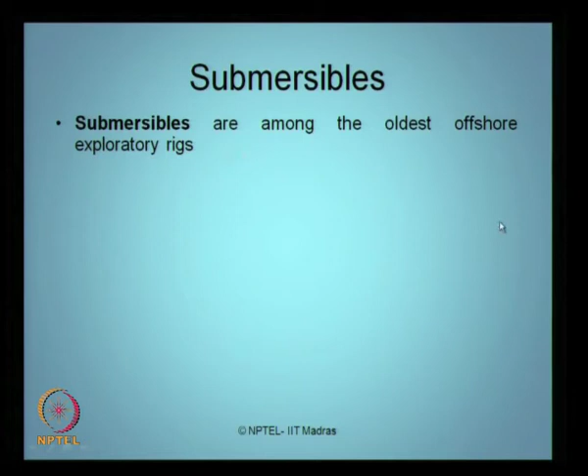What are semi-submersibles? Semi-submersibles are also compliant type drilling structures, one amongst the oldest offshore exploratory rigs used for oil exploration in deep sea. They typically operate in wetlands and swamps, standing in water depths up to 30 meters.

Submersibles include posted barges, bottle types, arctic types and inland barges. A submersible rig floats on the water surface when moved from one drilling site to another, similar to what we have seen in the last lecture about jack-up rigs.

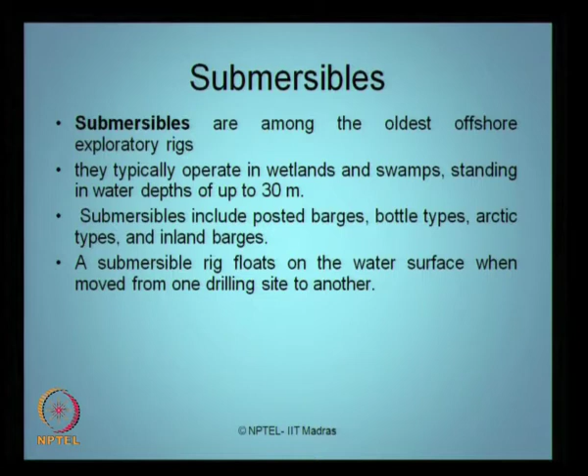When it reaches the destination, certain compartments are flooded, which we call ballasted, to submerge the lower part of the rig to the sea floor. The lower part of the rig rests on the sea floor and therefore the drilling operation can continue.

With the base of the rig in contact with the ocean bottom, it has a very good resistance for the encountered lateral forces like wind forces, wave forces and currents. They have very little effect on the structural motion of semi-submersibles.

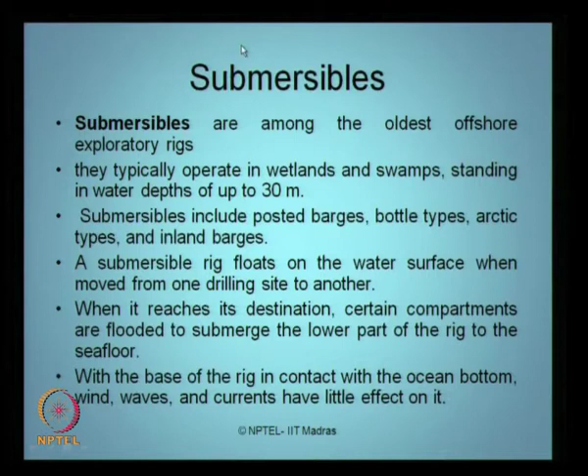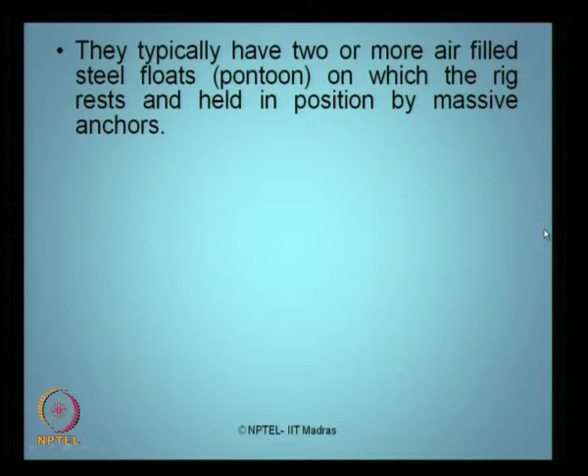They typically have 2 or more air-filled steel floats, which we call pontoons. They are similar to the pontoon member in tension leg platforms. There can be either 1 or 2 large size air-filled floats on which the rig rests, held in position by massive anchors to which these semi-submersibles are anchored to the sea floor.

Because the pontoons are usually submerged a few feet below the water surface, they have very high stability of operation during drilling, which is why they are called semi-submersibles. They have much better stability compared to a drilling ship, because a drilling ship actually floats in water while drilling is carried out, whereas semi-submersibles rest on the sea floor when drilling is carried out.

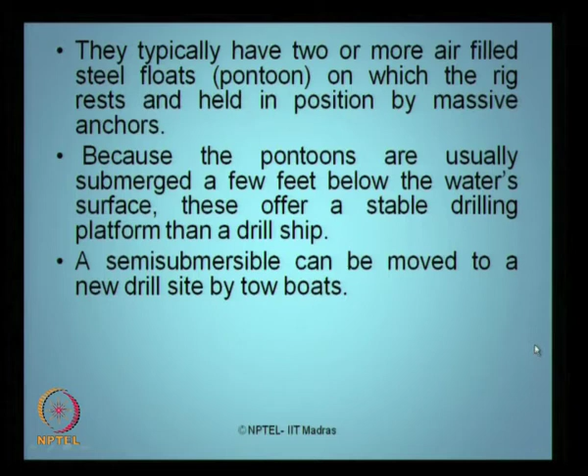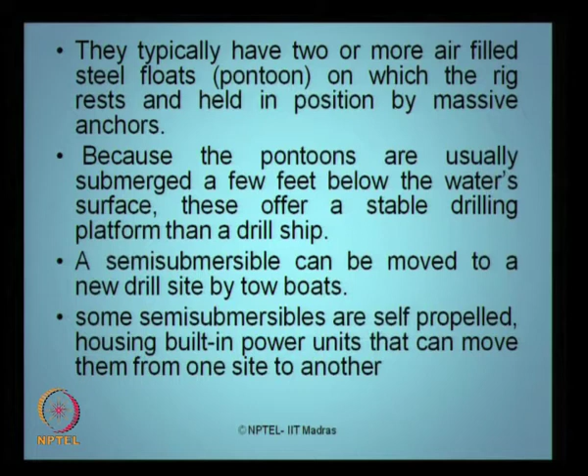A semi-submersible can be easily towed or moved from one site to a new one by towboats. Some semi-submersibles are also equipped with self-propelled inbuilt power units, which can be used to propel them from one site to another.

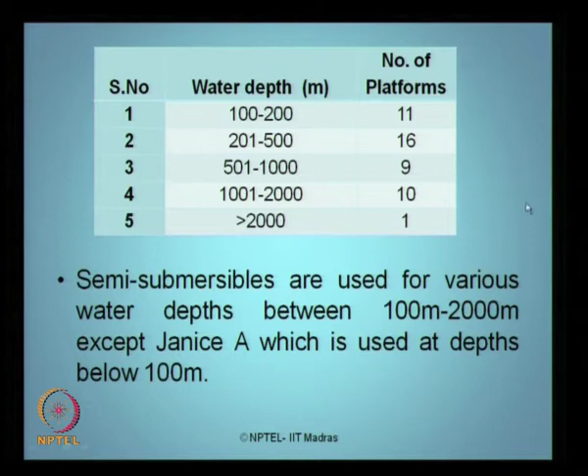Semi-submersibles are actually used for various water depths ranging from 100 meters up to 2000 meters. One exception is Janice A, which was used at less than about 100 meter depth. Looking at the deepest and shallowest platforms of semi-submersibles as of now, Atlantis, Blind Faith and Thunder Horse are different deepest platforms, all located in the United States, whereas the shallowest platforms are mainly located in Brazil.

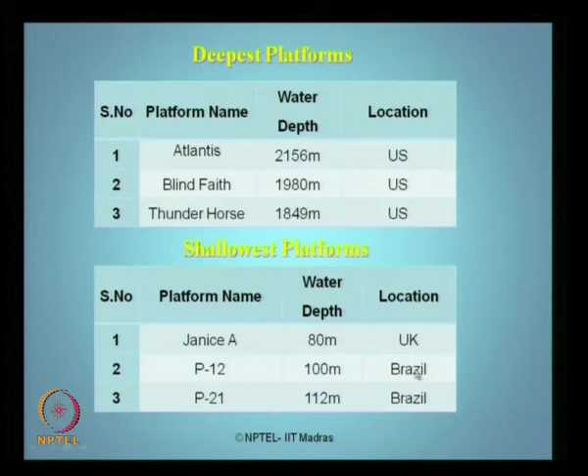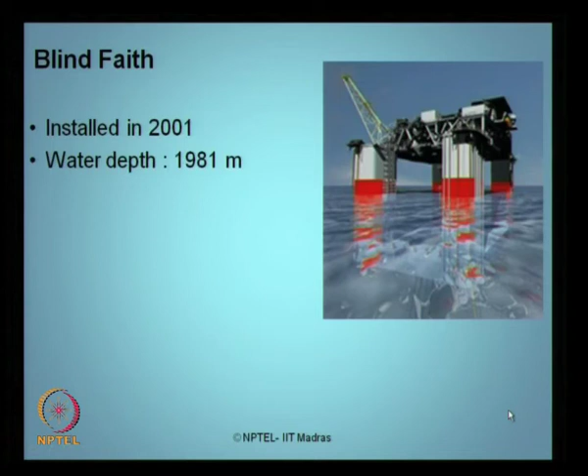Looking at the photograph of Blind Faith, one of the deepest semi-submersibles installed in United States waters, installed in the year 2001 at a water depth of about 1981 meters, 65,000 barrels of crude oil per day is the production capacity of this platform, and it produces 55 million cubic feet of natural gas per day.

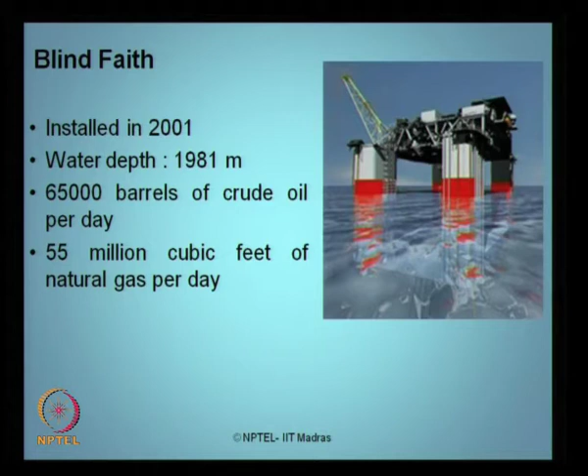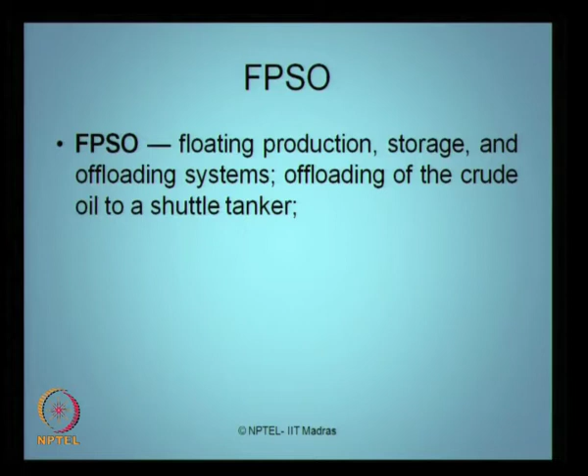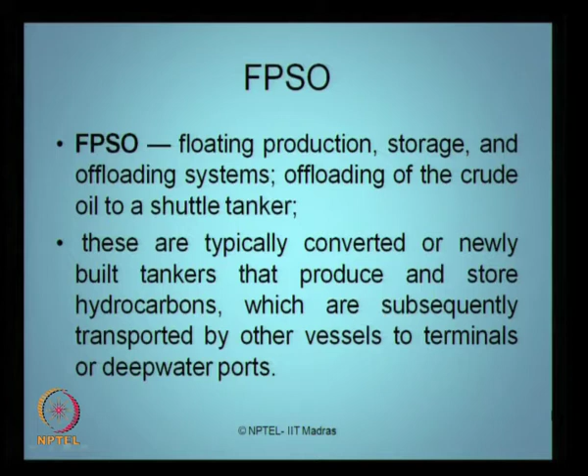The other type of offshore compliant platform is what we call FPSO. FPSO abbreviates for floating production, storage and offloading systems. Essentially, the offloading is done onto a shuttle tanker, of the crude oil extracted from the seafloor. FPSOs are typically converted or newly built tankers. They produce and store hydrocarbons which are subsequently transported by other vessels to terminals or deep water ports.

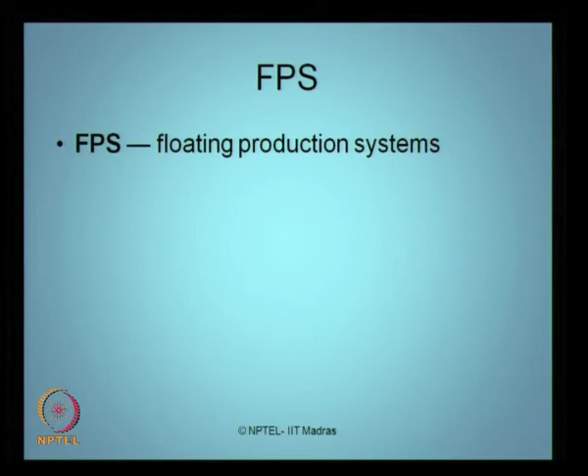You also have something called FPS, where there is no offloading system available; these are what we call floating production systems. The universal term FPS refers to all production facilities that float rather than are structurally supported by the seafloor.

Ladies and gentlemen, in the previous lectures you have seen offshore structures which are bottom supported, for example steel jacket platforms which are anchored to the seafloor through piles. You have also seen bottom supported structures resting on their self weight, for example gravity based structures or GBS. We have also seen compliant structures like tension leg platforms which are anchored down to the seabed using tethers or cables.

In general, floating production system refers to all those production facilities which actually float rather than being supported by the seafloor. This includes TLP, spar, semi-submersibles, ship shape vessels, etc. All of them come under the common bracket of what we call floating production systems.

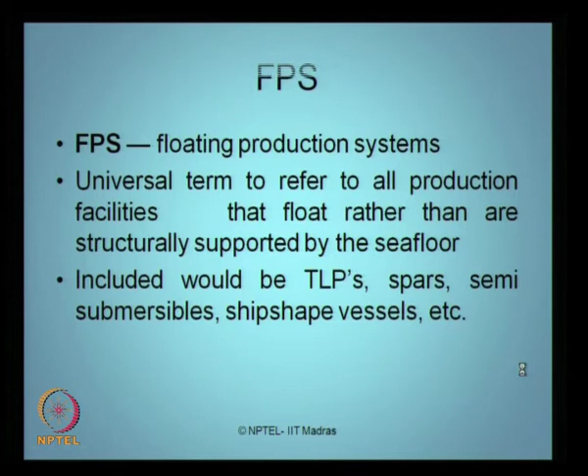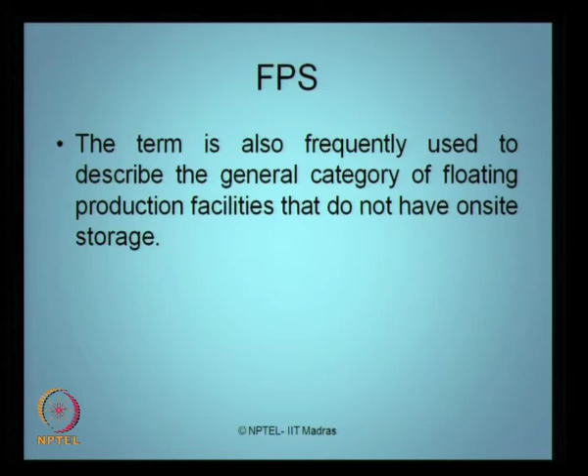The term is also frequently used to describe the general category of floating production facilities that do not have on-site storage. It is also used by the American Bureau of Shipping to describe a classification of floating production facility that does not have storage capability in general.

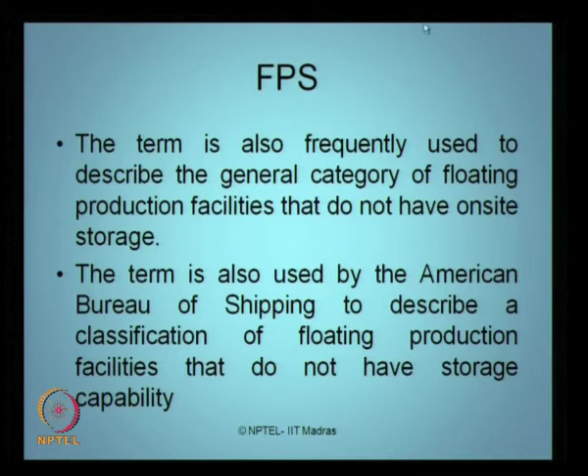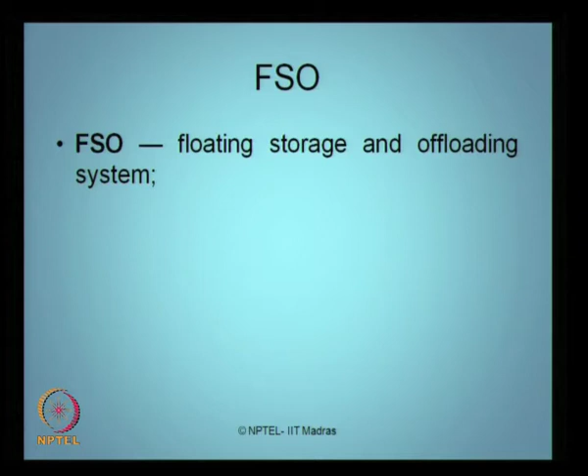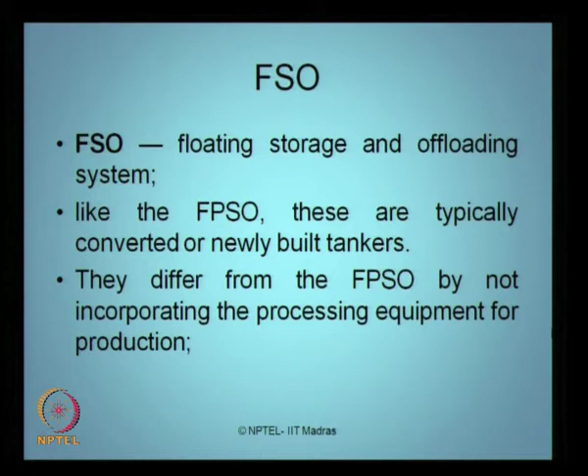When we talk about FSO in the literature, they are otherwise called floating storage and offloading systems. Understand that there is no production unit attached to this kind of floating system. Like FPSOs, they are typically converted or newly built tankers used as storage or offloading systems. They differ from FPSO because they do not have any processing equipment required for production.

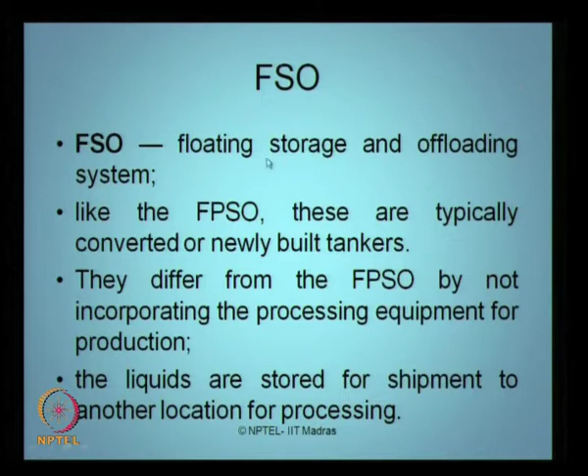The liquid is stored for shipment to another location for processing. Essentially they are floating storage units, and they can also be used as offloading systems.

Now the question comes, what do we understand by offloading? Offloading is a term related to transfer of produced hydrocarbon from an offshore facility into a shuttle tanker or a barge for transporting it to further deep water ports.

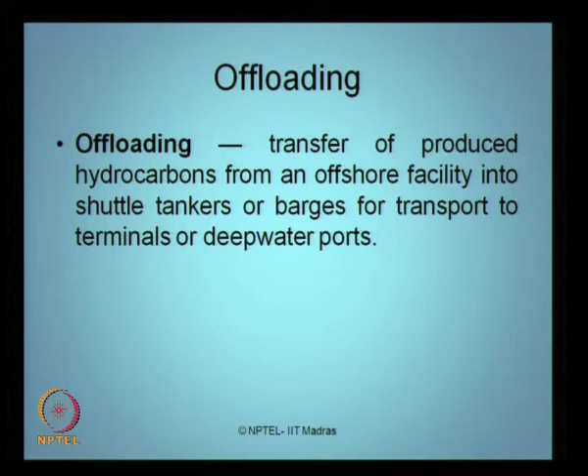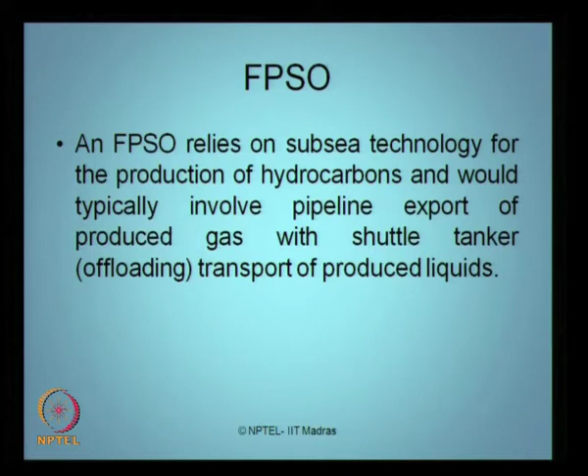An FPSO relies on subsea technology for production of hydrocarbon, and this would typically involve pipeline export of produced gas, with a shuttle tanker that transports the explored hydrocarbon from offshore to onshore, which is what we call offloading systems.

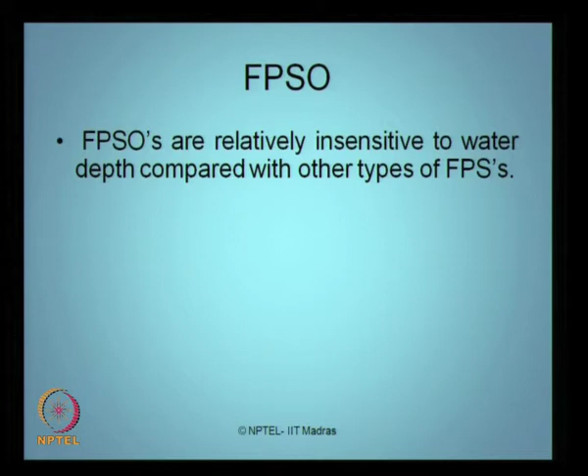FPSOs are relatively insensitive to water depth because they are floating systems. As we understand, for example like TLP, any floating system which is not resting on the sea floor attracts less forces when installed in deep waters.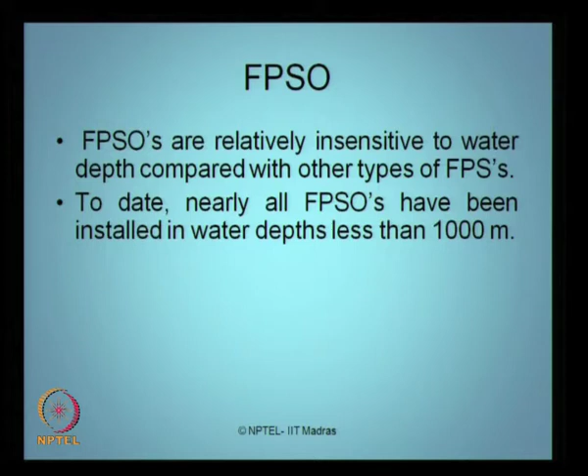To date, nearly all FPSOs have been installed at depths less than about 1000 meters. That is a great advantage. Therefore, FPSOs are generally used for deep water oil exploration. Some units are meant for production, some are meant only for storage and offloading - so it can be either FPSO or FSO.

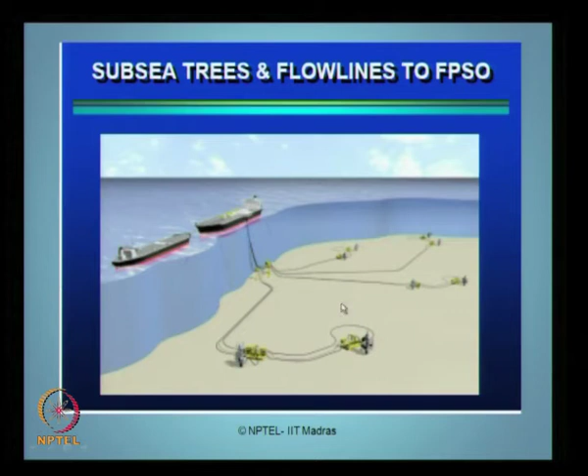This picture shows the different layout of subsea trees and flow lines attached to an FPSO. These are two FPSOs - one can be an offloading tanker, one can be a storage vessel, which can be an FSO, or a production facility having different drilling units and drilling location sites, all connected to an FPSO as seen here. This is what we call the subsea layout of subsea trees.

This is a typical figure showing different components of an FPSO. For example, if you look at the flare stack, it has a gas turbine, there is an off-take system with an offloading facility, and there is a central moon pool with specifications and standards that can house the risers through which flexible risers enter for production systems.

It contains a bridge, main control room, heli deck and living quarters on the top deck. In the middle deck it contains lots of machinery rooms, which we call high and low voltage rooms, engine and boiler rooms on the upper hull and engine and boiler rooms on the lower hull. Transformers and switch rooms are located at both the lower and upper hull.

The bottommost hull will have thruster rooms, azimuth thrusters, on either side of the FPSO, whereas the chain mooring system will be attached to the lowest hull.

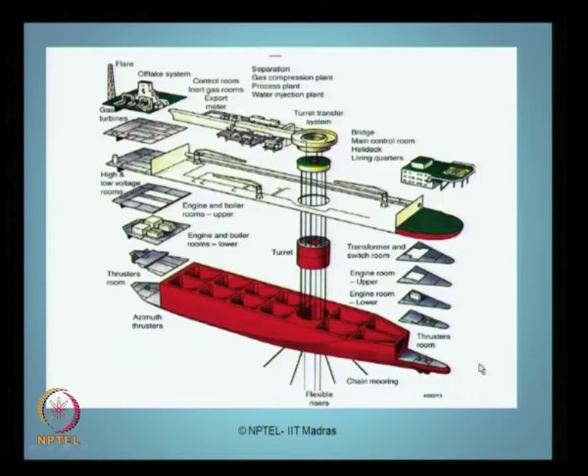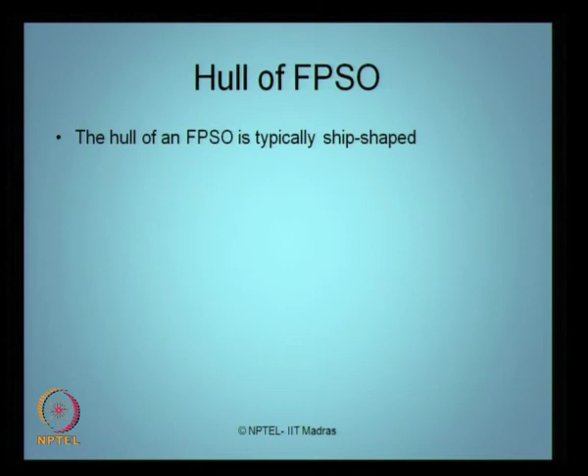If you look at the hull configuration of an FPSO, the hull is typically ship shaped. Recent research has been done at IIT Madras to study semi-submerged and FPSOs which are non-ship shaped - I will discuss these briefly at the end of my presentation. A hull of an FPSO can be a mono hull structure, that is having a single hull, such as spar or purposefully built barge shaped vessels.

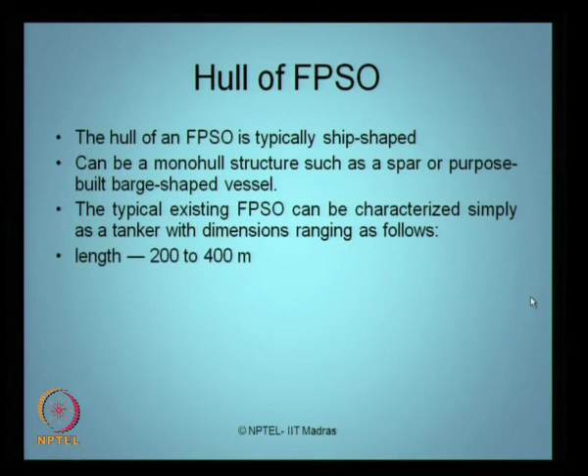The typical FPSO can be characterized simply as a tanker with dimensions as follows. The length can vary anywhere from 200 meters to 400 meters, whereas the breadth can vary from 30 to 60 meters and the depth or the height can vary from 20 to 30 meters.

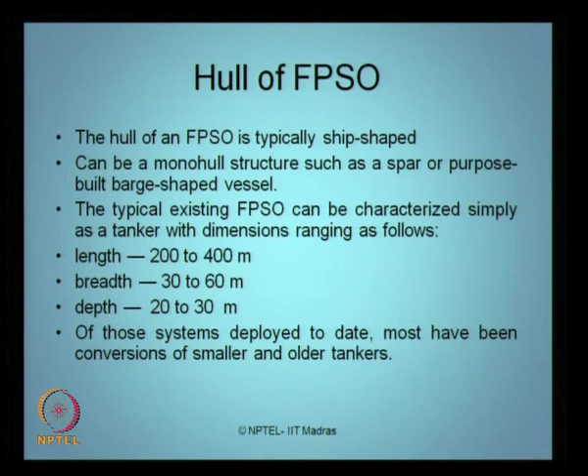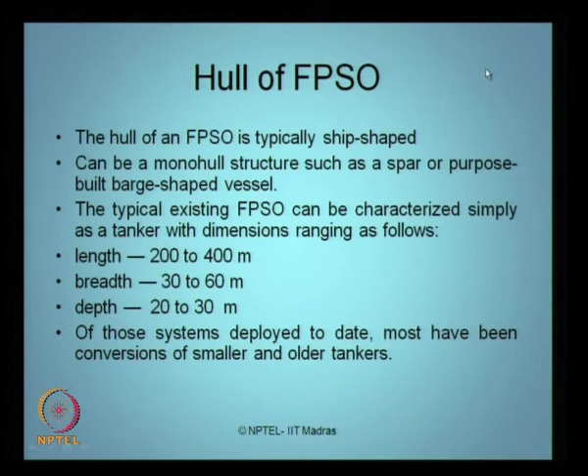Of those systems deployed to date, most of them have conversions of smaller and older tankers. Generally FPSOs are very rarely newly built, they are actually converted modules of old tankers which have been used for production, storage and offloading facilities in the sea. One of the major advantages of converting an existing vessel to an FPSO is saving of time, which can be used rapidly for the first production. For example, a newly purpose-built FPSO will take few years to commission. Instead, people generally go for conversion of existing floating barges to FPSOs.

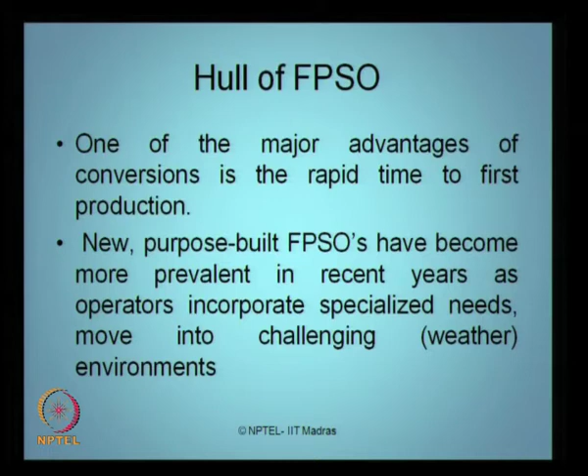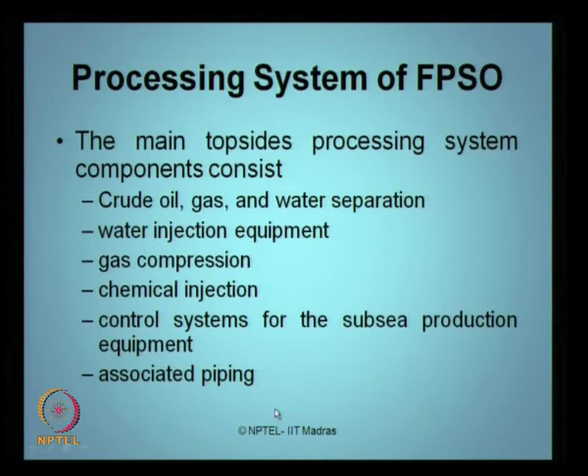If you look at the processing system deployed on an FPSO, the main topside processing system consists of various components used for processing and production of crude oil, gas and water separation units. There can be requirements of water injection equipment, gas compression units, chemical injection units and equipment. It will also house control systems for subsea production equipment, and associated piping also forms a part of the processing system of an FPSO.

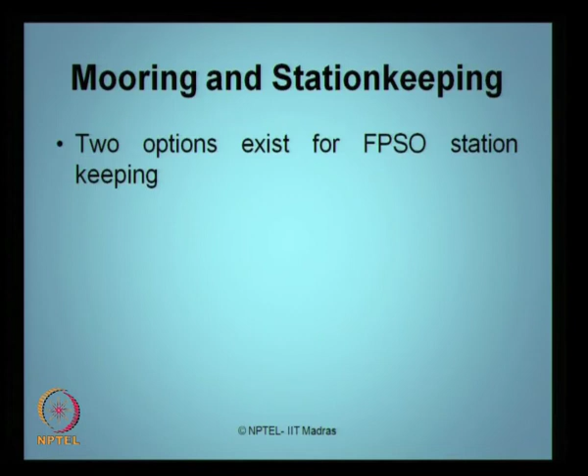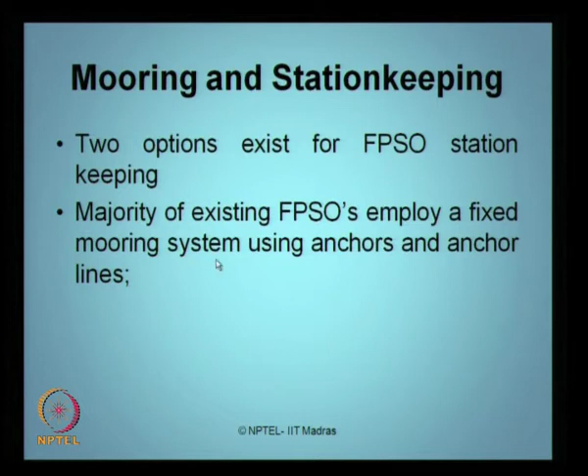Let us quickly look at the mooring and station keeping of an FPSO. There are two options for station keeping. Majority of existing FPSOs employ a fixed mooring system which uses anchors and anchor lines to hold it in position. FPSOs can also use dynamically positioned systems, called DPS, that employ a series of thrusters and positioning technology which depends on satellites and GPS receivers, etc.

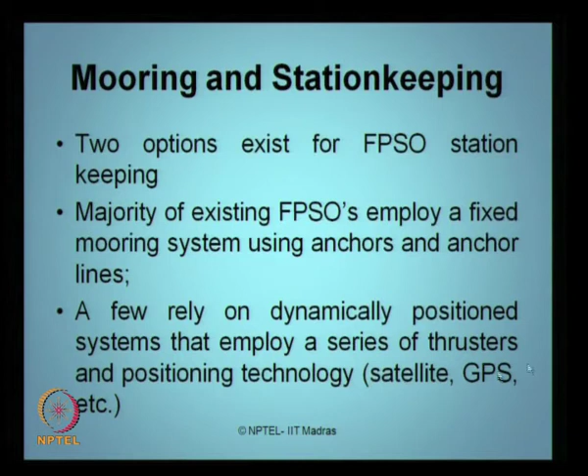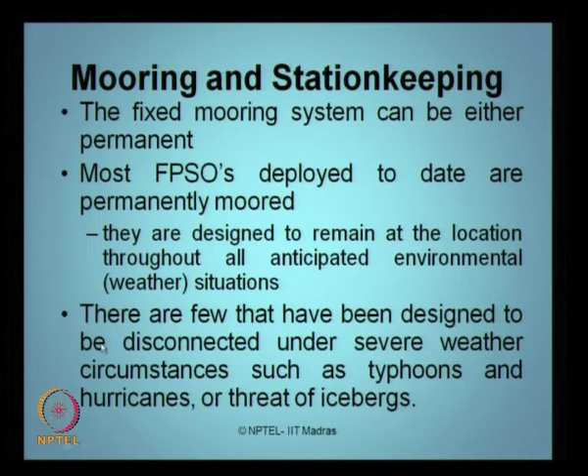The fixed mooring system can either be permanent or temporary. Most FPSOs deploy a permanently moored system, designed to remain at the location throughout all anticipated environmental situations. They are not decommissioned even though the weather can become rough. There are very few cases where they have been designed to be disconnected under severe weather conditions such as typhoons and hurricanes or iceberg threats.

If you look at the mooring systems generally equipped for an FPSO, we have two classified mooring systems: turret mooring systems, which are either internal or external. In internal mooring systems we have the large internal turret mooring system, small internal turret mooring system, buoyant turret mooring system, and submerged turret production system.

As you can see, the diameter of the internal mooring system for a large type compared to that of a small one is very different, whereas for a submerged turret production system, the turret mooring system is submerged in the FPSO vessel itself, whereas in all other three cases they are housed on the top hull.

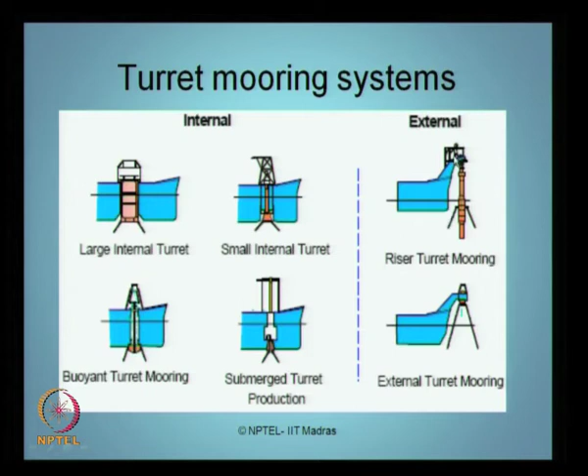If you look at the external mooring system, you can see that the production risers are cantilevered away from the FPSOs, whereas in internal mooring systems there is a moon pool which passes through the semi-submersible or the FPSO, through which drilling takes place. That is why these kinds of mooring are called internal, whereas these kinds are called external because they cantilever out from the FPSO hulls.

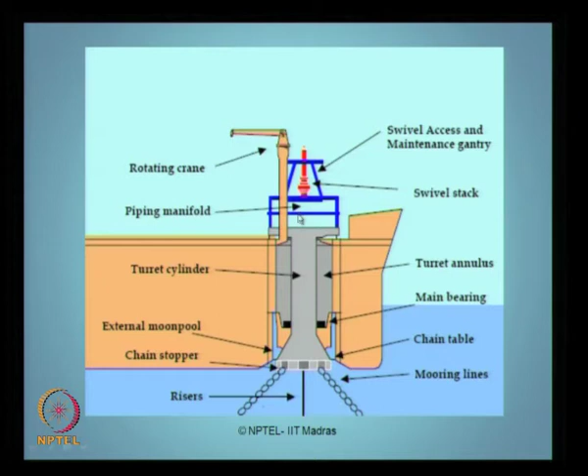The advantage of a disconnectable mooring system is you can demobilize the personnel and assets during emergency. When you connect a mooring system or a riser to an FPSO or any floating system, there will always be a coupled action imposed on the floating system by the dynamic sway action of the riser or the mooring cables. In such a situation, in case of any emergency, to safeguard the personnel or assets, you can disconnect the mooring system from the FPSO so that the floating system can be saved from the coupling action imposed by the risers.

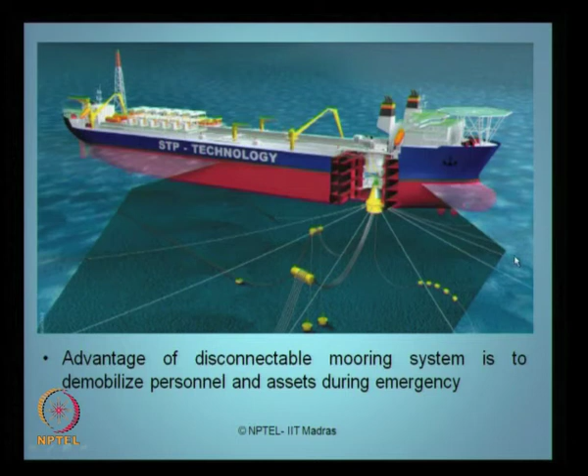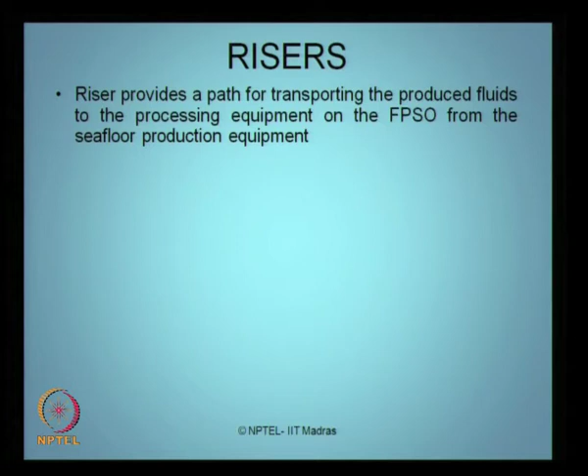Let us quickly talk about the risers which are deployed in FPSOs for oil production. Risers actually provide a path for transporting the produced fluid to the processing equipment which are housed on the top hull of an FPSO. Gas export lines, which are used in addition to the shuttle tanker operation, will also exit from the FPSO in a similar manner as the riser.

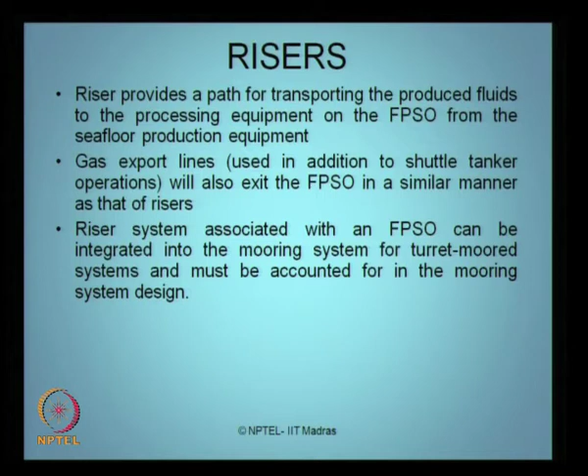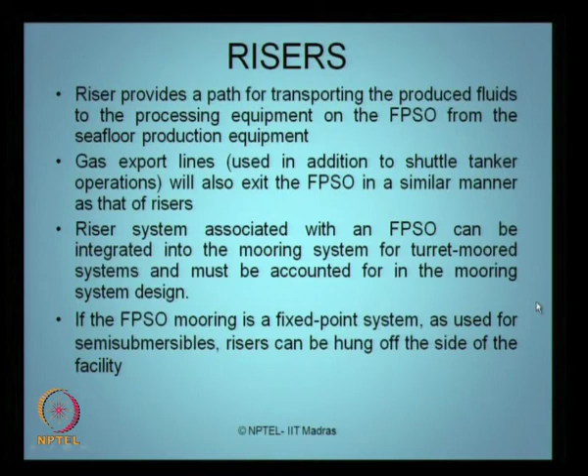The riser system associated with an FPSO can be integrated with the mooring system for a turret moored system, as we just saw in the previous slide. However, when you connect the riser system integrally with the turret mooring system, you must design it for coupled analysis, as I mentioned earlier. In an FPSO, the mooring system can also have a fixed point system, generally used in the case of semi-submersibles. In that case, risers can be hung off the side of the facility, as we see in the case of external turret mooring systems.

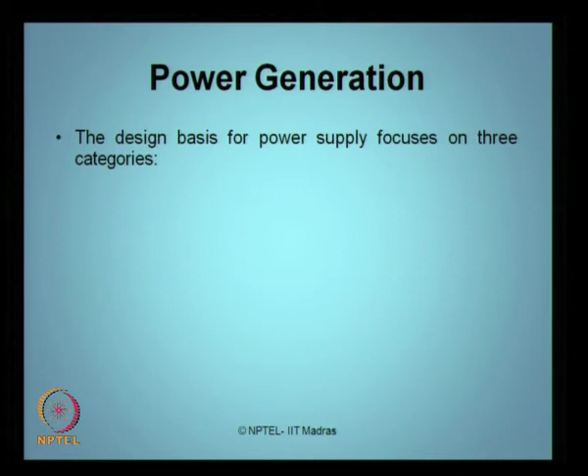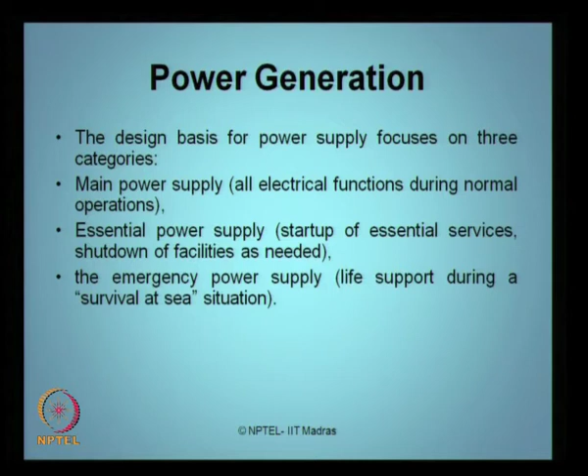If you look at the power generation units generally put on semi-submersibles and FPSOs, the design basis for power supply focuses on three categories. One is the mains power supply, required for all electrical functions during normal operation. The other is essential power supply, required for startup or shutdown of facilities as needed. The third is vital power, an emergency power supply required when a survival-at-sea situation arises.

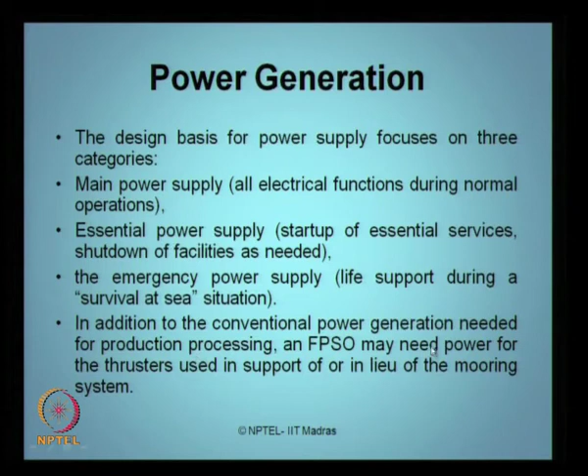In addition to the conventional power generation needed, FPSOs also require power for thrusters used in support of the mooring system.

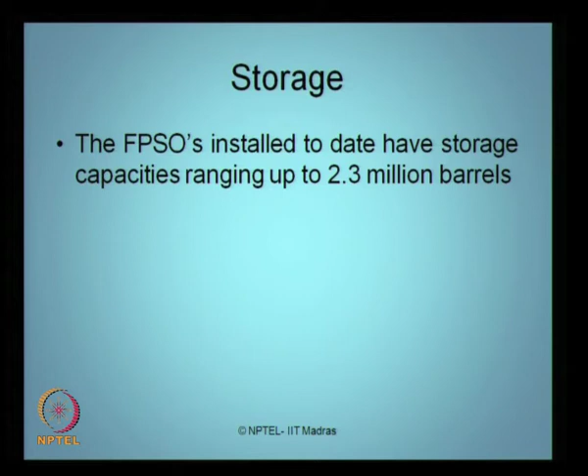Looking at the storage of an FPSO, the FPSOs installed to date have storage capacity ranging up to 2.3 million barrels. The storage capacity of any FPSO depends on many parameters: the ship size, the availability and size of the offtake vessel through which the stored oil can be transported to other production or processing facilities, the projected downtime, which is the time of operation the FPSO will remain at sea for production, and the cargo destination, how far the site of operation is from the shore.

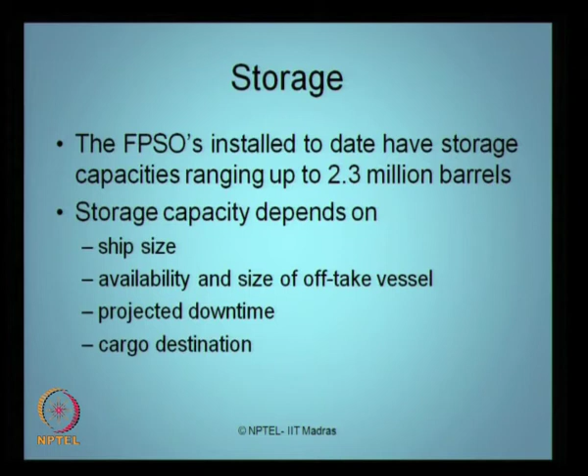Now let us look very briefly at the offtake systems used in FPSOs. Offtake essentially means offloading. Offloading is a term related to transferring the produced oil or hydrocarbon from the barge or floating system to another location.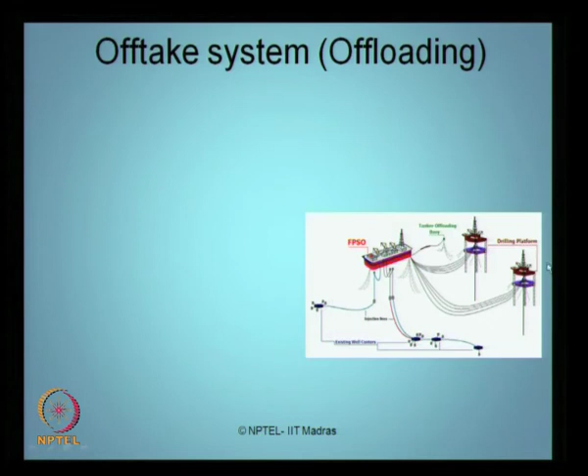Further, from the FPSO, it is transferred to an offloading system via a buoy. The liquid hydrocarbons from an FPSO are offloaded to a shuttle tanker, which further transports it to onshore. Offtake systems include equipment associated with storage tanks, the shuttle tanker, mooring lines, buoys and transfer hoses. So in total, the equipment associated with storage tanks, the mooring lines used for holding down the offloading system, the buoys used for transferring crude oil from the FPSO to the offloading system, and the transfer hoses together are what we call an offtake or offloading system.

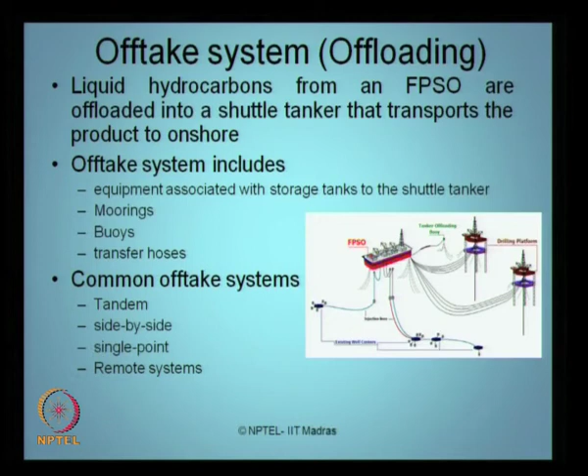Common offtake systems can be tandem, side by side offtake system, single point offtake system, or remote systems. I will show you some pictures of side by side and tandem. This is an FPSO equipped with a tandem offloading system. You can see this is my FPSO, whereas along with this, in tandem, I have an offloading system which is towed along with it together. This is what they call a tandem offloading system.

Whereas in this case, an FPSO used for production is also equipped with a side by side offloading system. This is actually a barge or tanker which has large capacity to store the produced hydrocarbon, a twin ship which sails together. This one is anchored and production takes place from here, anchored to the FPSO, and the produced hydrocarbon from this location is offloaded to this barge. This is what we call a side by side offloading system, whereas the earlier case is the tandem offloading system.

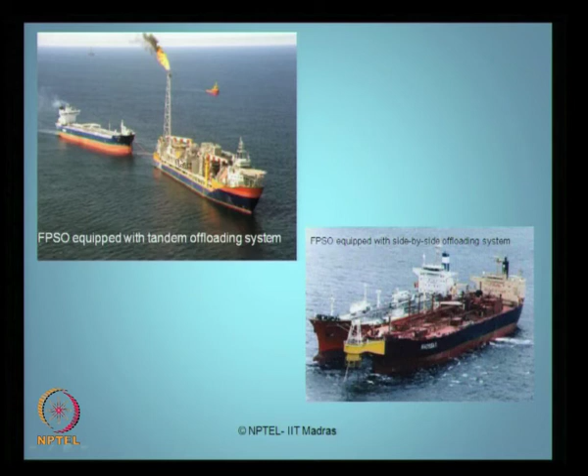If you look at the FPSOs and offloading systems constructed as of today, we have 3 constructed in North America and 14 in South America. Large numbers are in Africa and Europe, and a few in Australia and Asia. Totally there are around 86 FPSOs constructed so far.

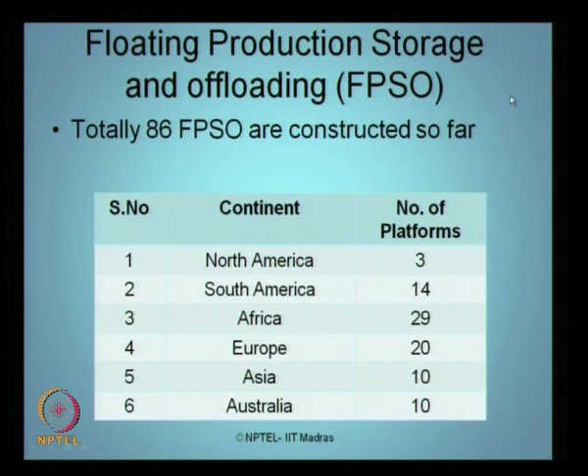Look at the water depth where they have been deployed. Less than 100 meters you got 17 numbers, whereas from 1000 to 2000 meters you got the majority with 22 numbers, and 33 platforms out of 86 are on average operating at a depth of more than 500 meters.

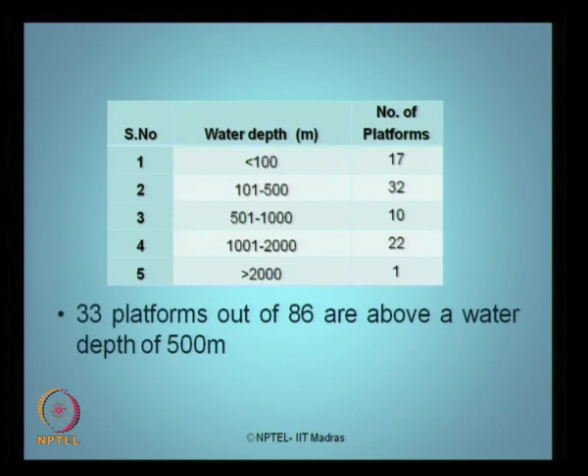So FPSOs are offshore production systems used for oil production and exploration in deep waters. If you look at the location of FPSOs, the deepest and shallowest, the deepest operation is about 2.15 kilometers deep, located in Brazil, whereas the shallowest can be as close as 13 meters in Nigerian waters.

If you look at a brief overview of different bottom supported and vertically moored structures, we have seen detailed discussion on fixed platforms. We have also discussed, as we go for deeper waters, compliant towers which we call articulated towers. Further, for deeper exploration, we discussed floating structures which are compliant in nature, where the TLP is a unique hybrid platform with a combination of two sets of different natural periods of the structural system. You can also have a mini TLP with a separate anchoring system. Here the tendons or tethers run through, and you have projection systems from which the tendons or tethers are anchored to the seabed.

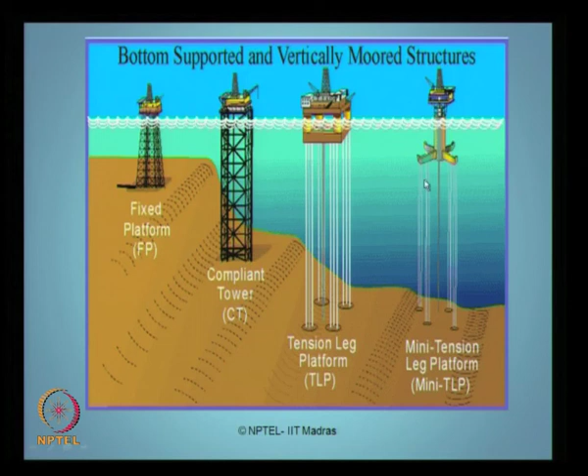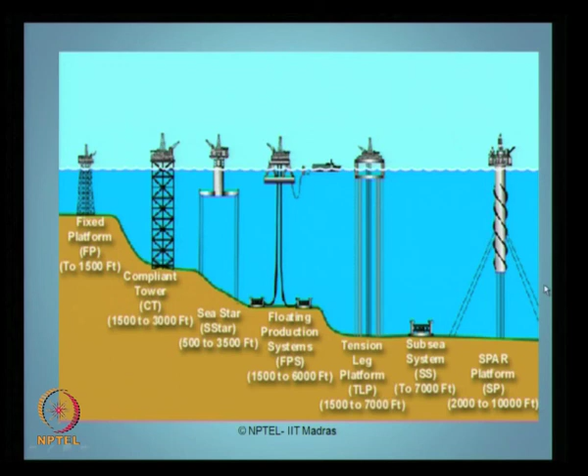This gives a comprehensive overview of different kinds of offshore structural systems which can be deployed from shallow water, medium water to deep water to ultra deep waters. If you look at floating production and subsea systems, you have a combination of spar platforms, floating production systems, and floating production storage and offloading facilities where you have a shuttle tanker in tandem attached with the FPSO.

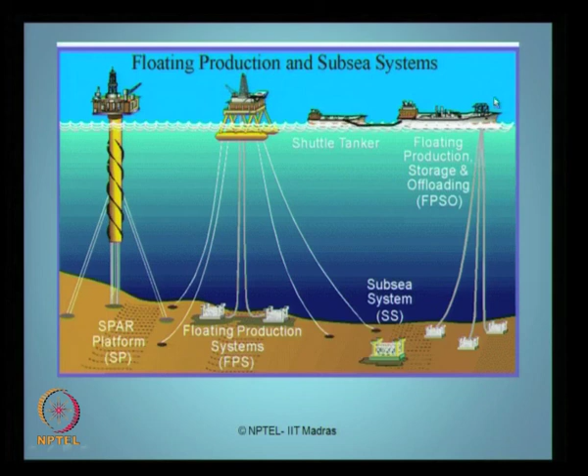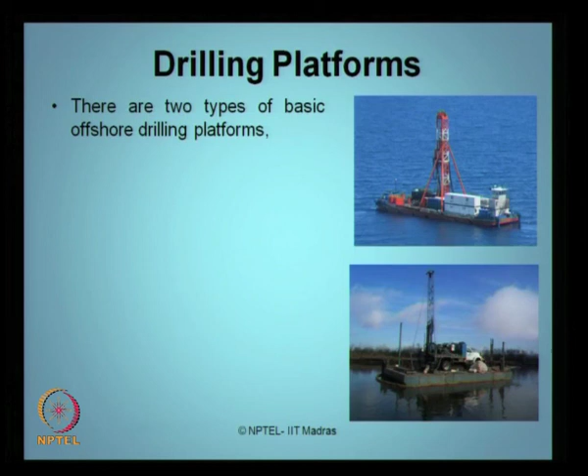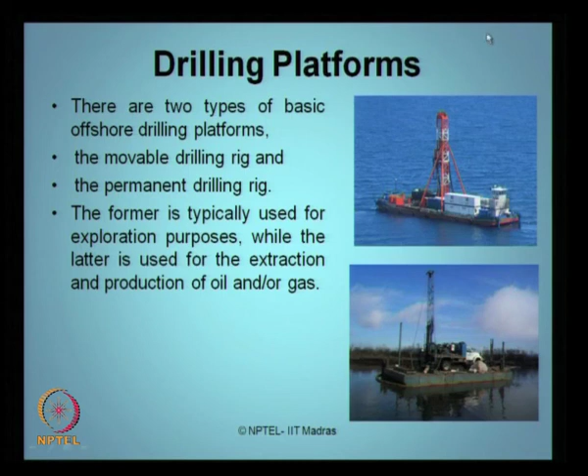Let us quickly look at the drilling platforms in general used for offshore drilling. There are basically two types of drilling platforms: one is what we call a movable drilling rig, the other is a permanent drilling rig. The former is used for exploration purposes, while the latter is used for production purposes.

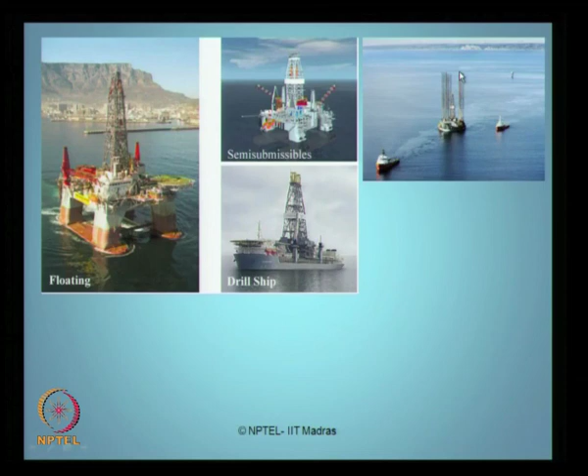I can give you some examples in this photograph. You can see a floating production platform, a typical example of a semi-submersible and a drill ship. I want you to name this particular type of structure. We have seen this in the previous lecture. Yes, you are able to recollect correctly, this is a jack-up rig. Now when the rig is actually floating, the legs are all raised up, that is why it is called a jack-up rig. I hope you have understood some basics of drilling from this lecture.